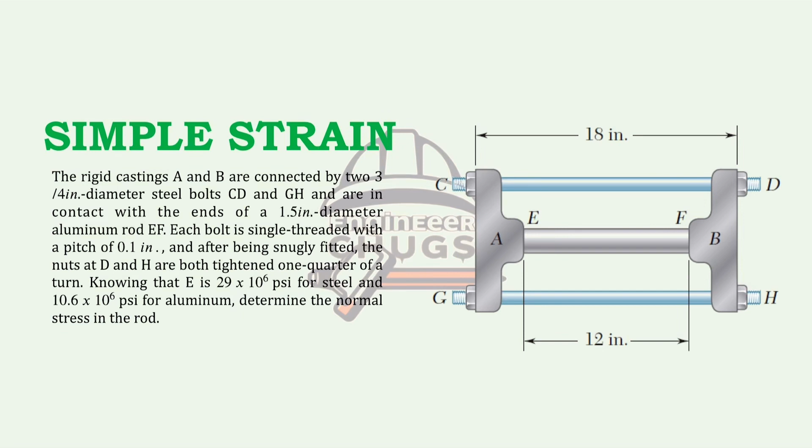Okay, so ayun, nandito tayo ngayon sa ating pangalawang problem sa simple strain. Rigid castings A and B are connected by two 3/4 inch diameter steel bolts. Ito yung steel bolt, ano? Steel bolts CD and GH. So, meron tayong steel bolt. Ito yung tinatawag na steel bolt. And they are in contact with the ends of a 1.5 inch diameter aluminum bar. So 1.5 inches yung diameter nitong rod EF. This is aluminum.

Each bolt is single threaded. Yung mga bolt dito is single threaded with a pitch. Yung pitch kasi, parang yung thread niya, yung thread ng bolt. And after being snugly fitted, the nuts D and H are both tightened 1/4 of a turn. Yung ikot, 1/4 of a turn. Knowing that the modulus of elasticity is 29 times 10 raised to 6 psi for steel and 10.6 times 10 raised to 6 psi for the aluminum, determine the normal stress in the rod.

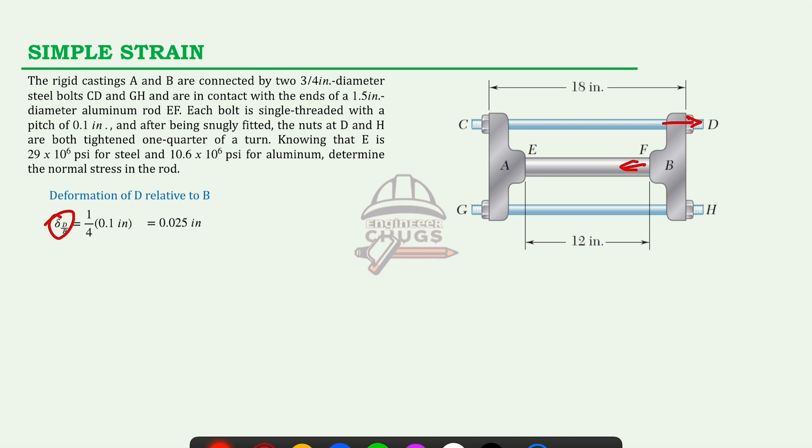So, ibig sabihin that the deformation relative dito the B is equivalent to the deformation of the steel bolt, minus, kasi diba papunta dito, minus the deformation naman of the rod. Ganyan yung ating magiging equation dyan, diba, that this deformation will affect the deformation of the two materials. That is the deformation of the bolt and the rod.

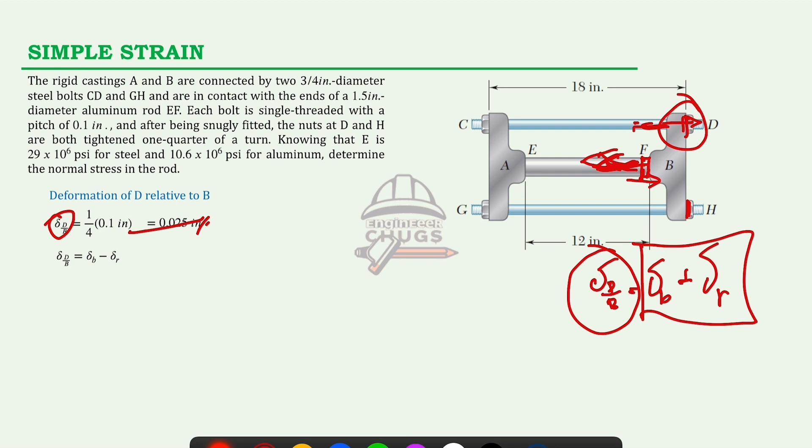Kaya lang ito minus kasi compressive. Compression siya. Pero kung para siya, ibig sabihin that is positive. Okay? So, that is our value. We have the deformation of D relative to B is equal to the elongation of the bolt minus the elongation of the rod. Okay?

So, yung mangyayari dito, kinuha natin yung value kanina. So, mangyayari dito sa ating rod, that would be positive. Diba? Kasi negative yung value natin kanina. So, negative times negative, that would be positive. Okay, so this would be 0.025. Okay? Typo error lang, sorry po.

Okay. So, ito yung ating magiging free body diagram. This would be your PB, the force of the bolt, and then the force of the rod. Okay, so ibig sabihin meron tayong PR is equal to 2PB. Ipasok lang natin yung PR in terms of PB, para masubstitute natin yung PR na 2PB para maging isa na to.

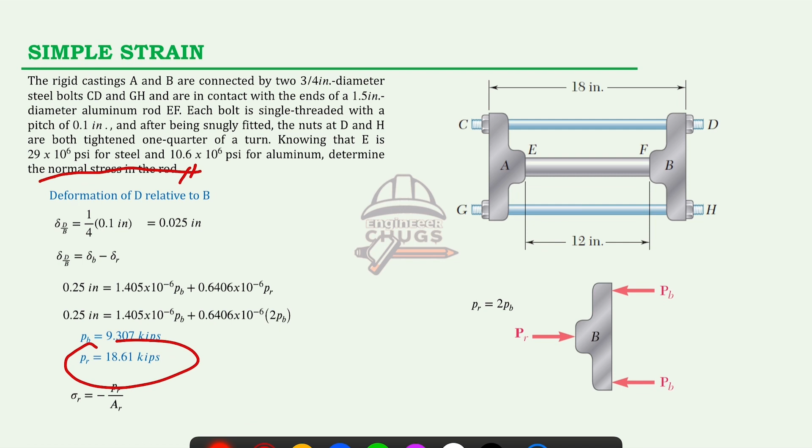Okay? So ngayon makukuha na natin yung value ng ating PR. Yung PR natin, that is 18.61. Yun yung kailangan natin, kasi yung hinanap is the normal stress of the rod. So ngayon, makukompute na natin yung stress of the rod. The stress of the rod is equivalent minus, kasi nga compressive siya, PR over AR. So, the stress is 10.53 ksi.